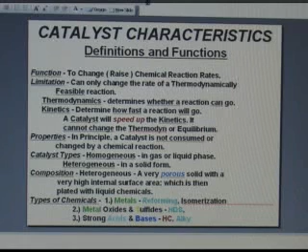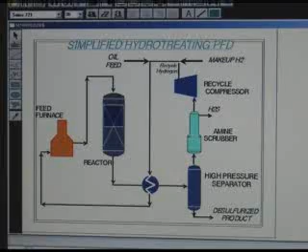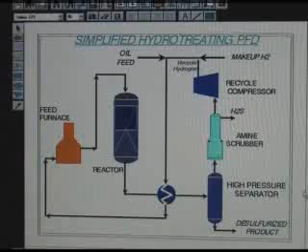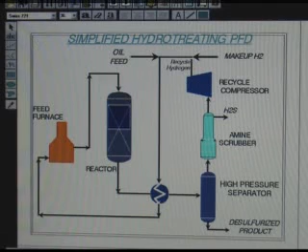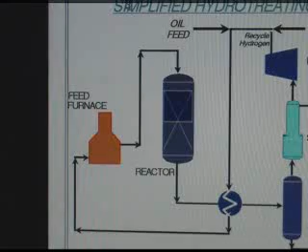Okay. This is a very simplistic diagram. Two feeds coming in, oil and makeup hydrogen. And they'll usually mix ahead of the heat exchange train. Keep in mind these are around 200 degrees or something. And this is coming off a makeup reciprocating compressor, so maybe it's 250 degrees. All right, well, typically we want at least 500 to 700 in here.

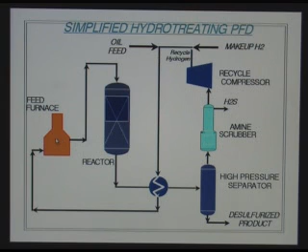So you have a heater, of course, but you want to minimize the size of that heater and the emissions on that heater. Right now in a refinery, to try to add a new heater in California is almost impossible because they won't permit the heater. Those heaters give you NOx and SOx and particulate, so they don't want to let you have a new heater. So you minimize the size of these heaters.

You do it with heat exchange. This is going to take a temperature rise. We already said a good 40 degrees maybe. So we might as well take advantage of that and recover that heat. So we exchange the feeds with, that shows one exchanger. It easily could be 10 shells. So anyway, heat it up the best you can. Now fired heater.

And one thing to remember on heaters, now this is an exothermic process, so the heaters generally aren't that big. Now in an endothermic process, which you'll see maybe next week I'll do a little reforming, there you need a lot more heat because you have to not only get the reactants up to the temperature you want in order to react on the catalyst, but then you have to supply that endotherm. It cools down, and you have to supply that.

This is exothermic, so these heaters don't tend to be as big as like a reforming heater, which is an endothermic process. I presume everybody knows what endo and exo mean.